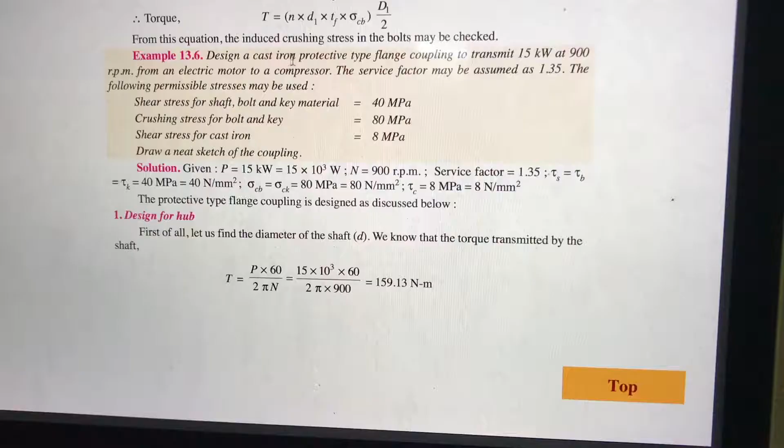We have a cast iron protective flange coupling. Here power is given as 15 kilowatt. Then RPM is given, also some shear stress, crushing stress, etc. are given.

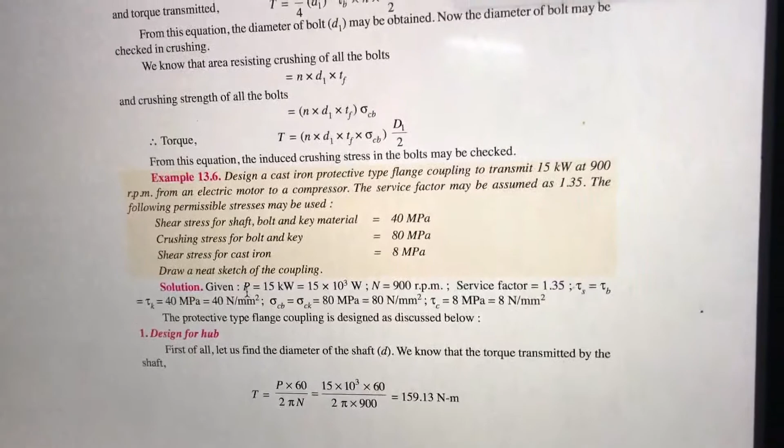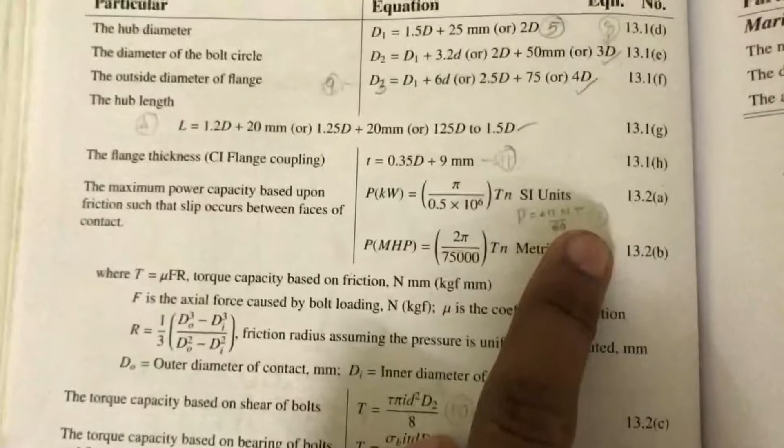The first step is P equals 2 pi n T by 60. Here power P is known, RPM is known, from which we can find T. Second step is T into service factor equals TS, so we can find that one.

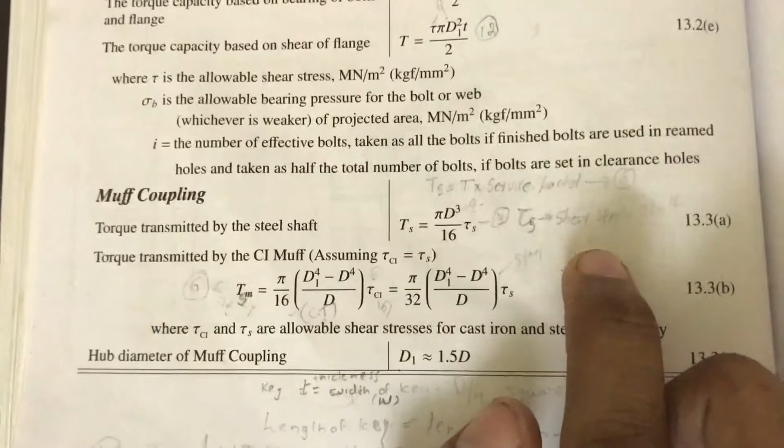Third step, TS equals pi D cubed by 16 into tau s. Here tau s is the shear strength, or shear stress, of the shaft that will be given in the question. And TS is known, so we can find D, diameter of the shaft.

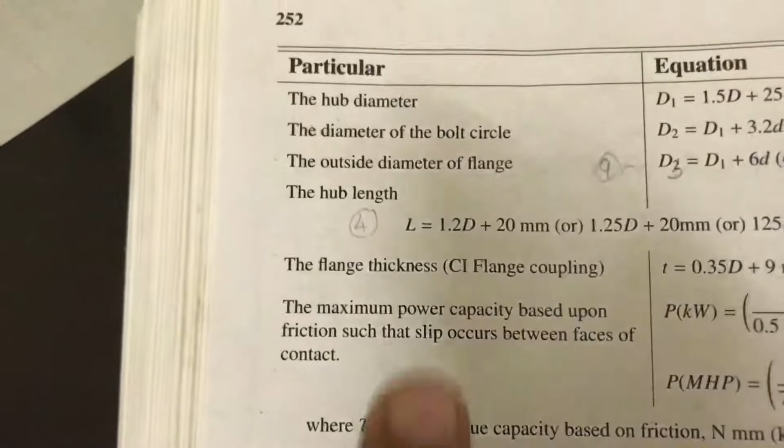For the fourth step, length L equals 1.5D, from which we can find the length. Then the fifth step is D1 equals 2D, from which we can find the hub diameter.

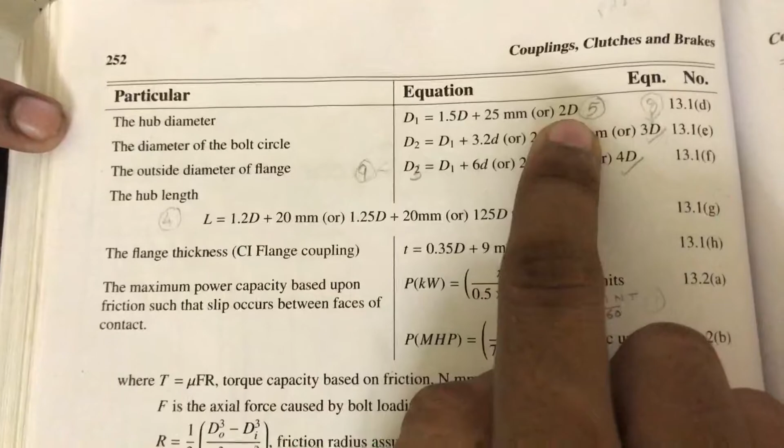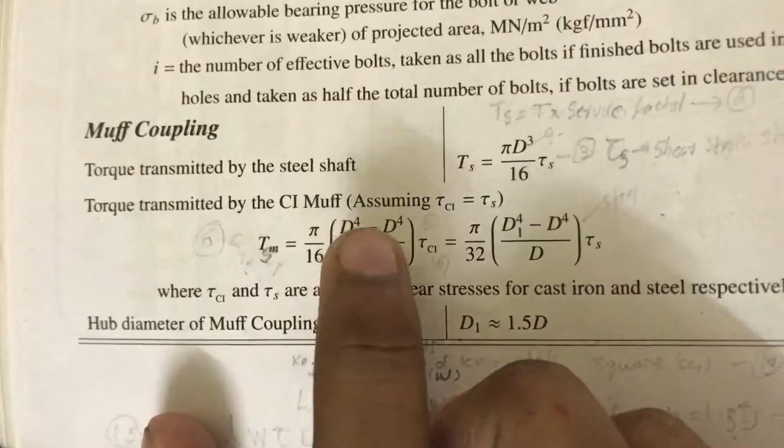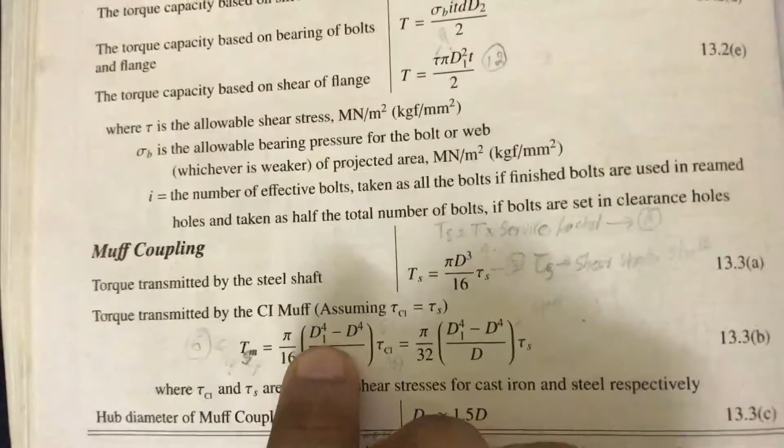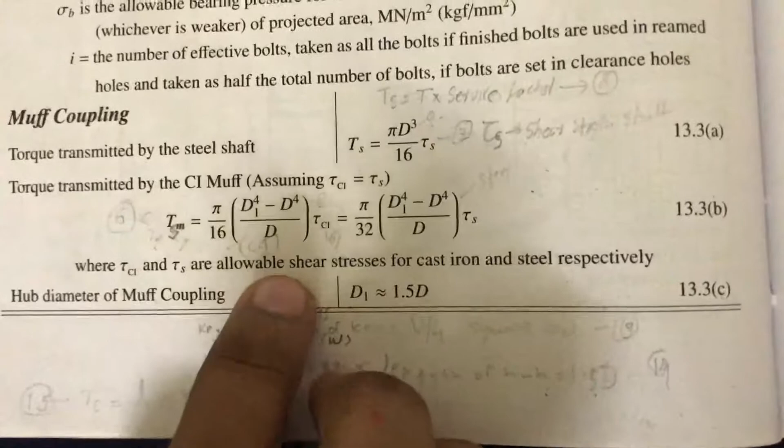So here D1 we have found, D we have found, so we will substitute all those things and find this tau CI, and check whether tau CI is less than the allowable shear stress for cast iron flange given in the question. In the given question, shear stress for cast iron is 8, so we will check whether tau CI is less than 8 or not.

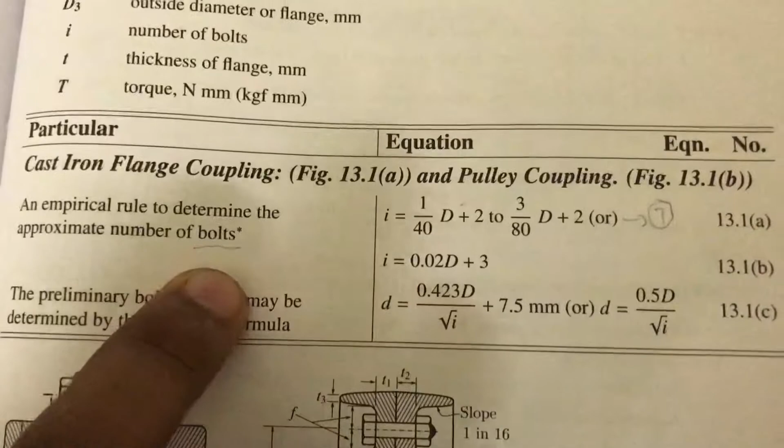After that we go for the seventh step, where we find the number of bolts. New heading comes: bolt. So i equals 1 by 40 into D plus 2. We will substitute all those things and find i.

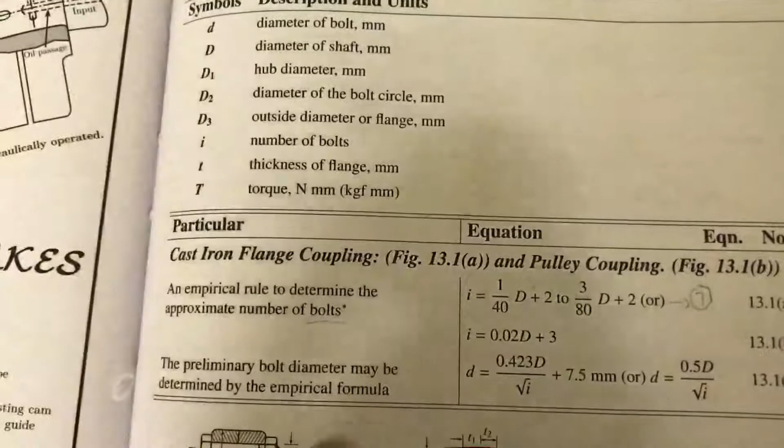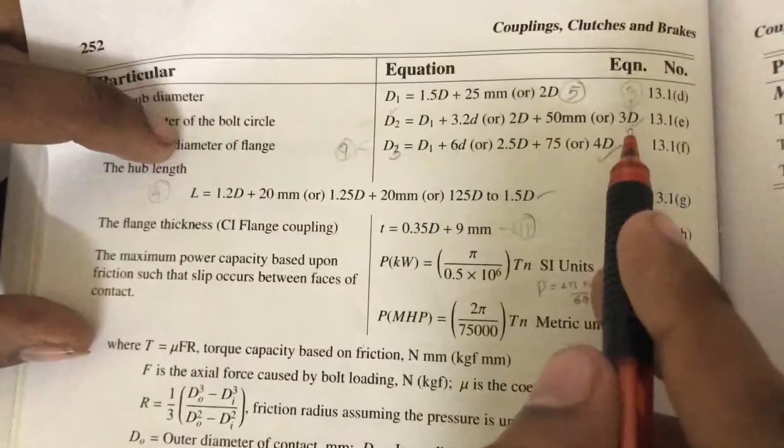Then eighth step: we find D2, where D2 equals 3D. In the ninth step we will find D3, where D3 equals 4D.

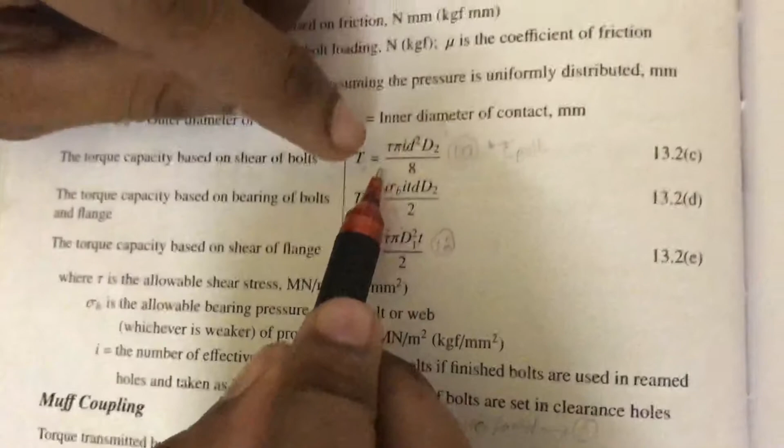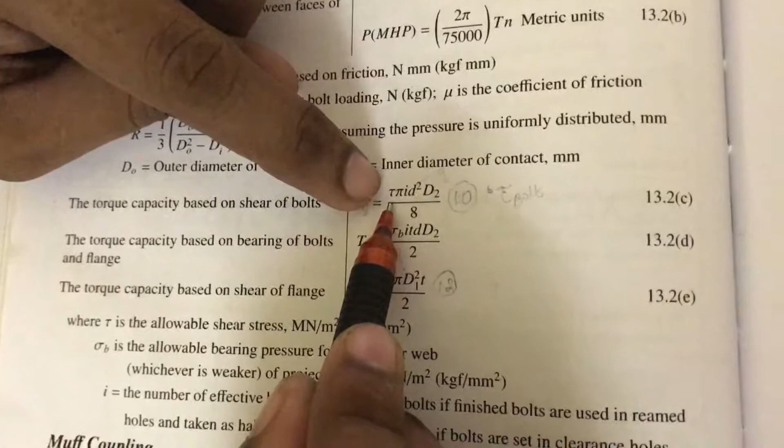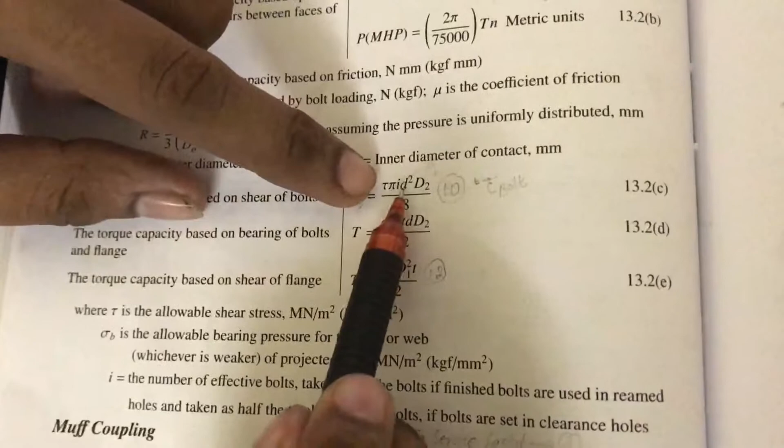In the 10th step, we are going to find the diameter of this bolt. What we do is we have tau, the shear stress of the bolt, which will be given in the question. Pi is given, i we have already found, number of bolts, and D2 we have found, so we will get D from this.

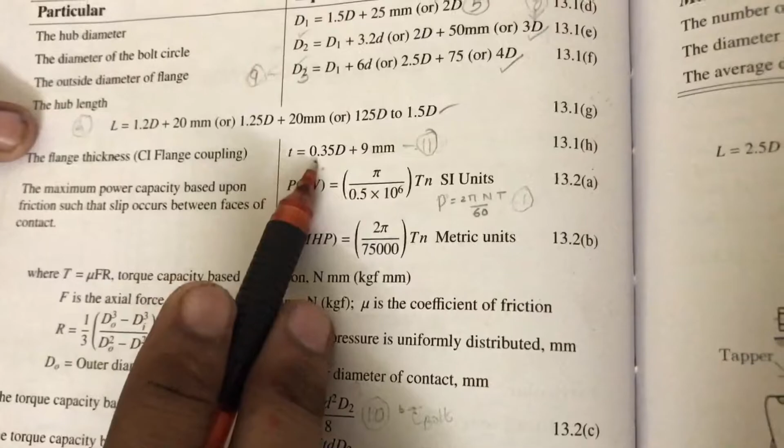After the 10th step we move to a new heading for flange. We will be finding flange thickness. Flange thickness T equals 0.35D plus 9 mm, so we will find the flange thickness.

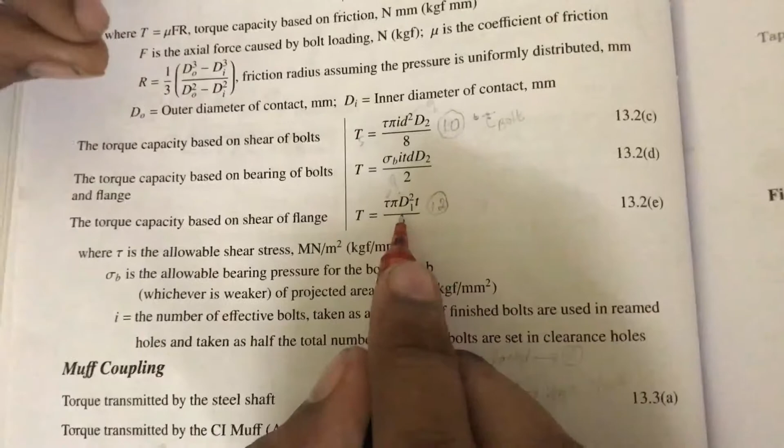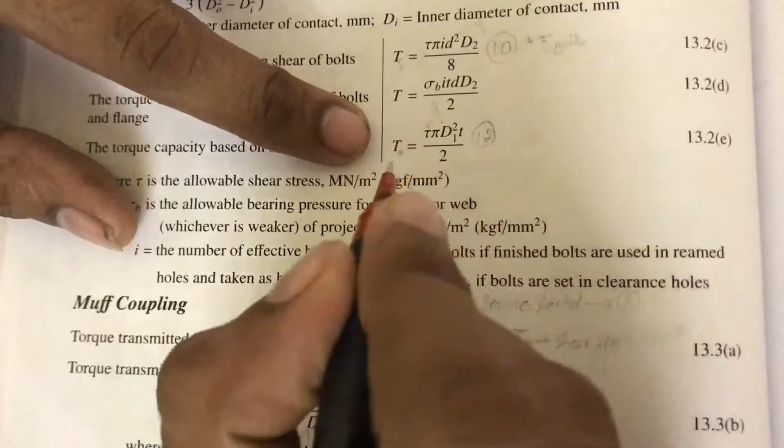Then 12th one is the torque capacity check. We have flange thickness T, and we have D1, and we have to check whether those are correct or not. T equals tau pi D1 squared by... so here we have to find tau. We will substitute D1, substitute T, and we have TS actually, which we have found, so from that we will get tau and check with the question.

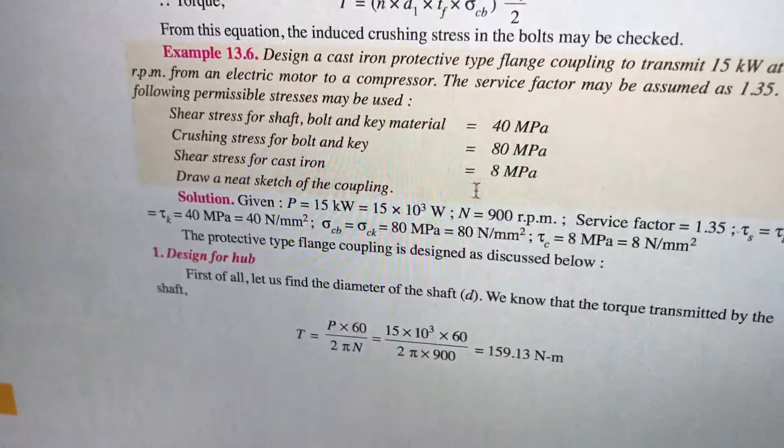In the question, it is given that for bolt, shear stress is 40, and we will find tau and check whether it is less than or greater than our given tau.

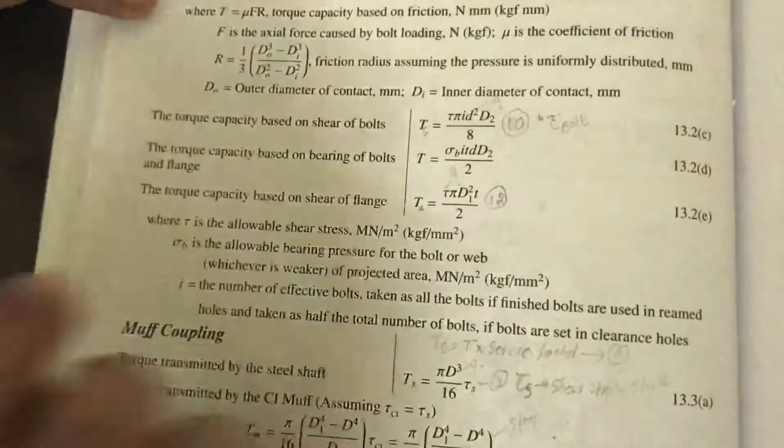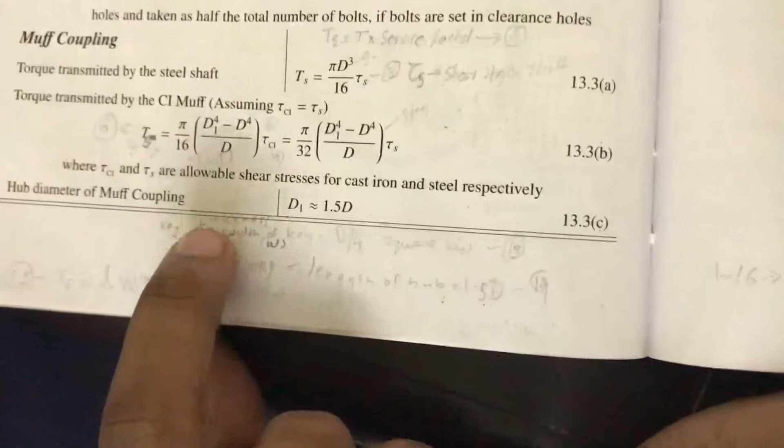Then in the 13th step, we go for key design. In key designing, the first one is thickness of key, which equals width of key, and that equals D by 4, shaft diameter by 4, and it is for a square key that we are writing all this.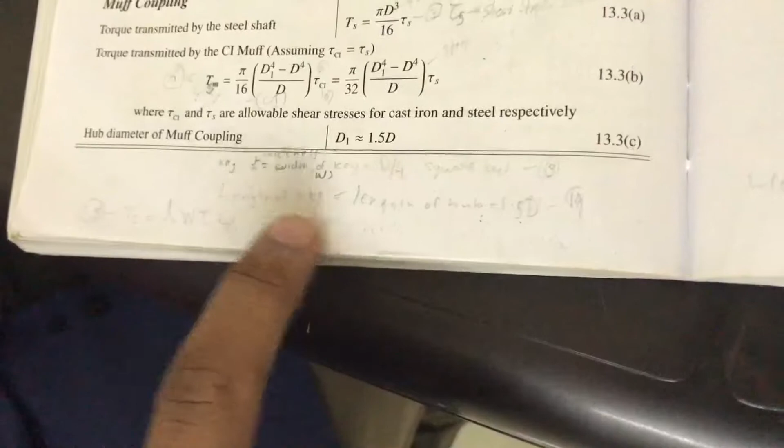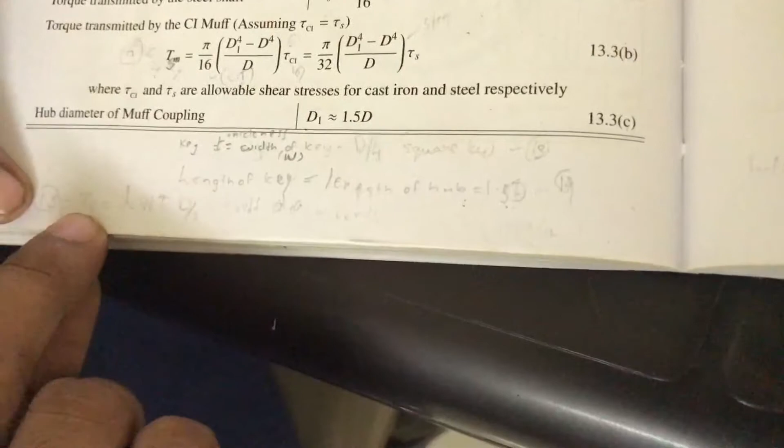Now length of key equals length of hub, and length of hub equals 1.5D, which we have already found, or can find once again. Now TS equals length of hub into width into tau into D by 2.

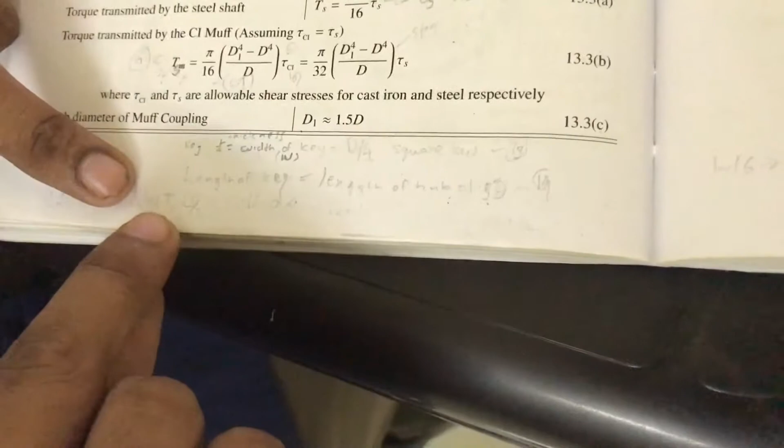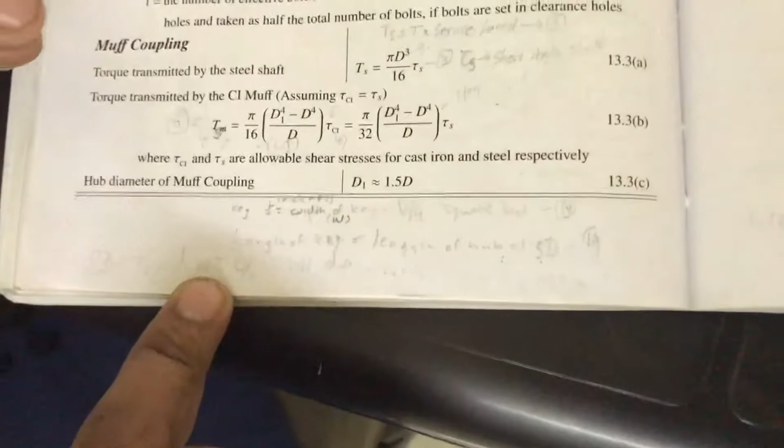Here L, length of key, is found, W width of key is found, tau is unknown, D by 2 is diameter of shaft by 2. TS is known, from which we will find tau, getting the shear strength for the key, and we will check it with the given shear strength.

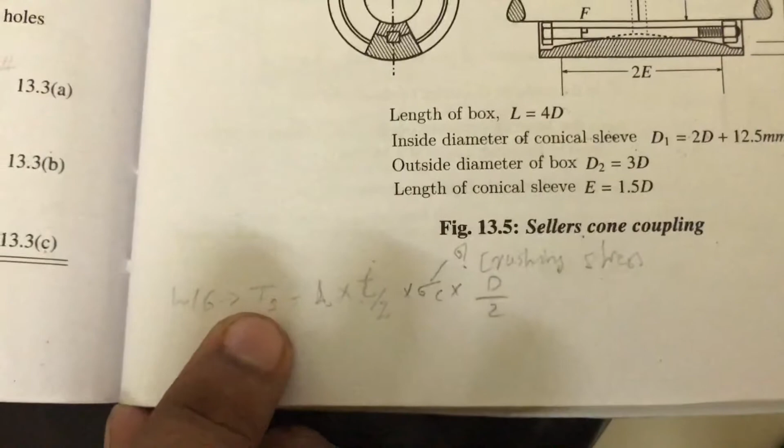Now here we have crushing strength. Crushing stress is also given in the question, but we will find sigma C with respect to given values. L is length of hub, T is thickness of key by 2, into sigma C. Sigma C is the thing to be found, D is diameter. TS is given, from which we will find sigma C and check it against the given value.

At last, if everything is okay, we will conclude.